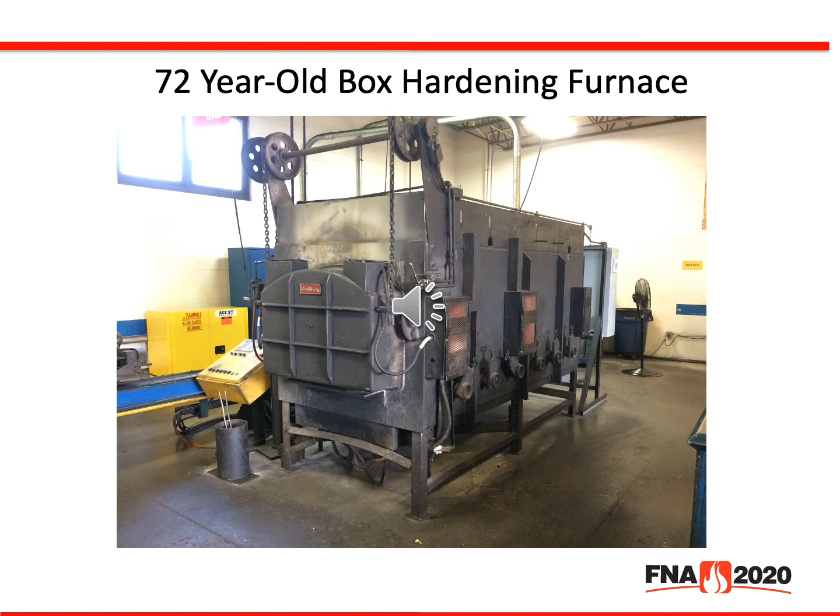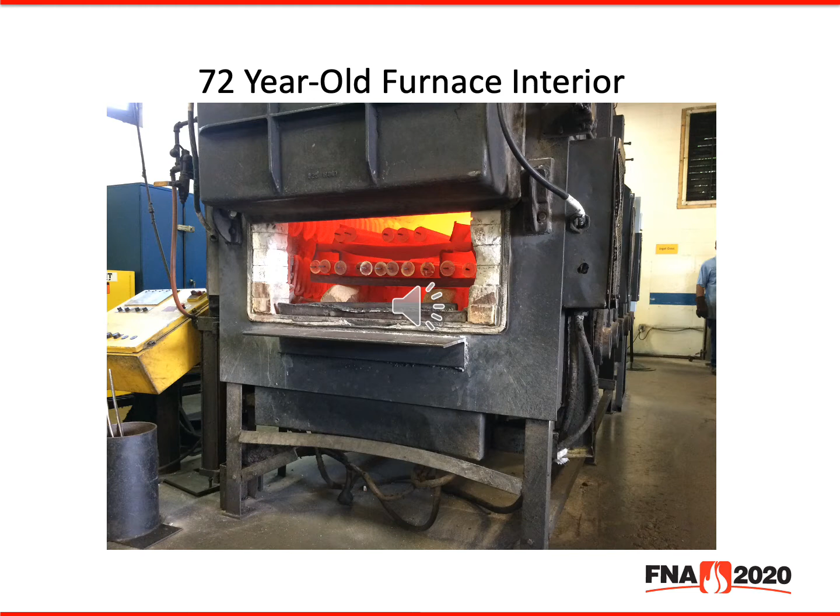This is slide 3. The front door is open. You'll see that there is a power connection for the front door, but looking inside, the customer's parts are placed on a rack that an operator typically reaches in with a pair of hot tongs, pulls them out, and feeds them into the forming press. You can see by the sway bar on the lower part of the furnace, it has been in operation for quite a while, but it's still kicking away.

This is slide number 4. This is a list of the key features that typically make up a box furnace. What we'll do today is review some of the temperature ranges of the various type furnaces, the heating element design, the gas burners used in gas-fired systems, atmospheres used in this equipment, the various types of refractory linings, some different hearth designs, and loading methods as well.

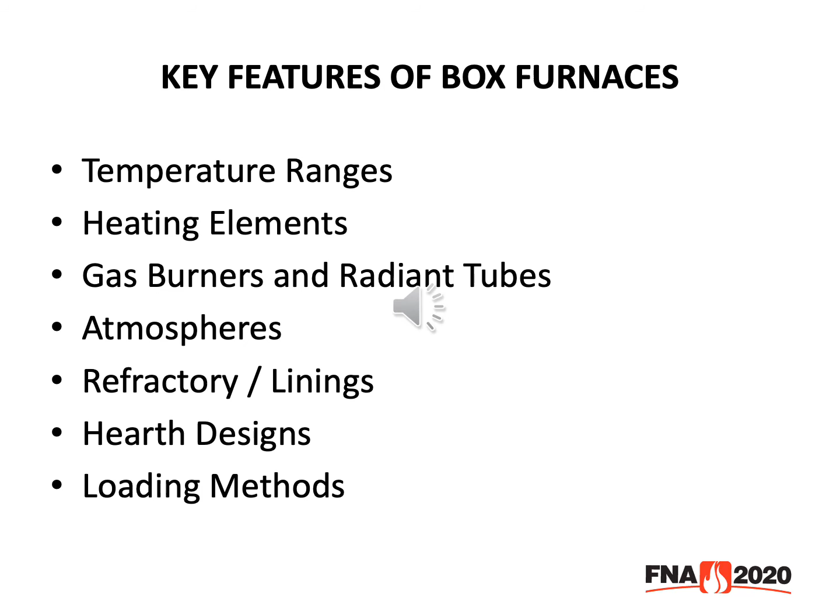This is slide number 5. We talk about temperature ranges in equipment. Oftentimes customers say, I need an oven, or I need a furnace, or I need something for temper or hardening, and they really don't know the application or the temperature ranges required of the material they're using. I've listed here 5 separate processes: tempering, hardening, annealing, carburizing, and tool steel hardening.

To the right, you'll see the typical temperature range for tempering, typically anywhere between 350 degrees to 1400 degrees F. For hardening, we're more in the range for steels, around 1500 up to 2000 degrees. For annealing, it can vary based upon the steel grade from 1400 degrees to 2000 degrees F. Carburizing in box type furnaces is typically done in the 1650 to 1800 degree F range. And hardening of tool steels ranges anywhere from 1800, 1900 all the way up to 2500 degrees F.

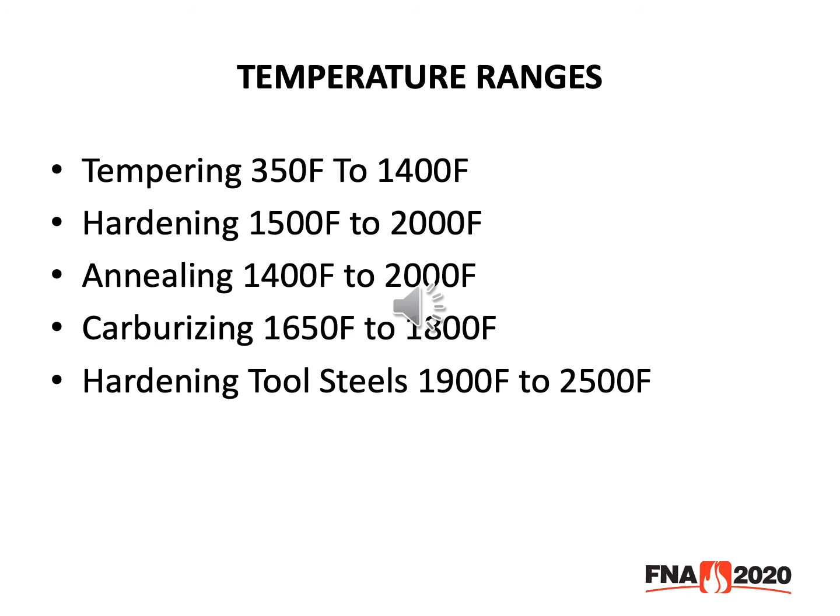Here in slide 7 is a 1400 degree tempering furnace, same size furnace with a workspace of 48 inches wide, 84 inches deep, probably rated for about 6,000 or 7,000 pounds. It has full width churning rollers, so in this application the customer is using a base tray with parts mounted on top of it, and he probably has a roller table in front that he would power in or pull out or push in the large capacity castings. Again, this has a vertical lift door. This particular model is gas-fired.

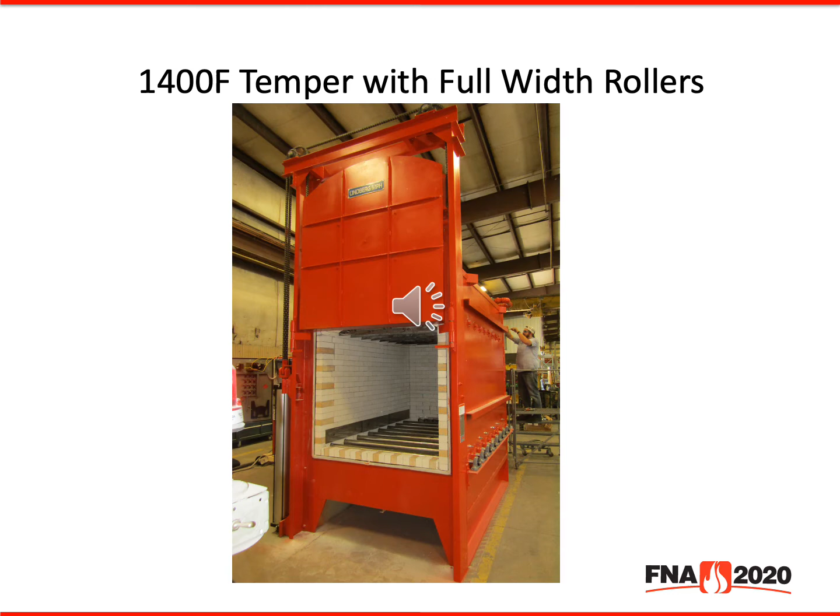In slide 8, this is a standard box hardening furnace. This unit would be rated for applications from 1400 to 2000 degrees F. It has a vertical lift door with a lift cylinder, so it's an air-operated door, with cam locks to hold the door tight. This furnace could also be used with an atmosphere, so to hold the integrity of the furnace, we have a door seal to make it gas-tight against any air rushing into the chamber. This is typically used for a nitrogen application, hardening tool steels. Again, this is an electrically heated unit.

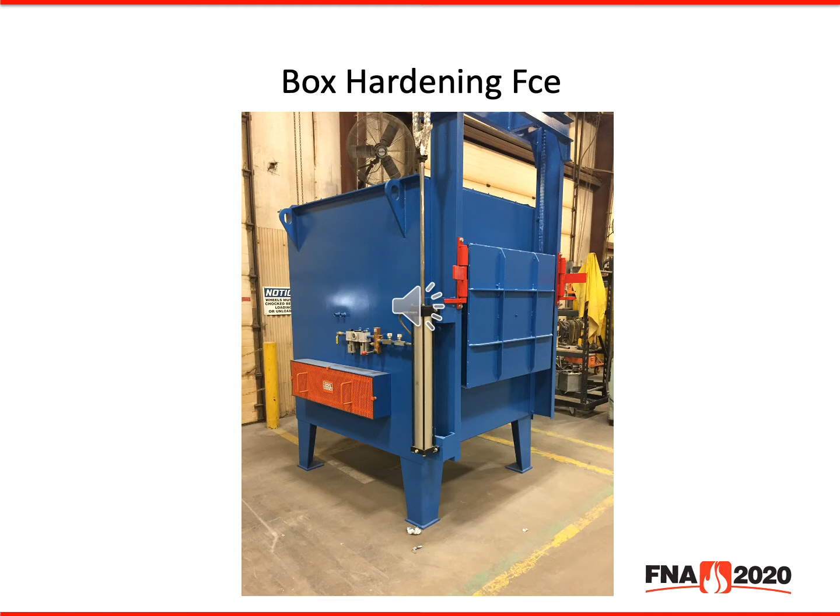In slide 9 here, you'll see a gas-fired box furnace. Again, a vertical lift door, a smaller chamber, probably a 24 by 36 by 24. This could be rated up to 2000 or 2200 degrees. At the rear back of the furnace, the lower part is a combustion air blower, and there are gas-fired burners on this side of the furnace, with probably 2 additional burners on the other side to provide the heating for this chamber.

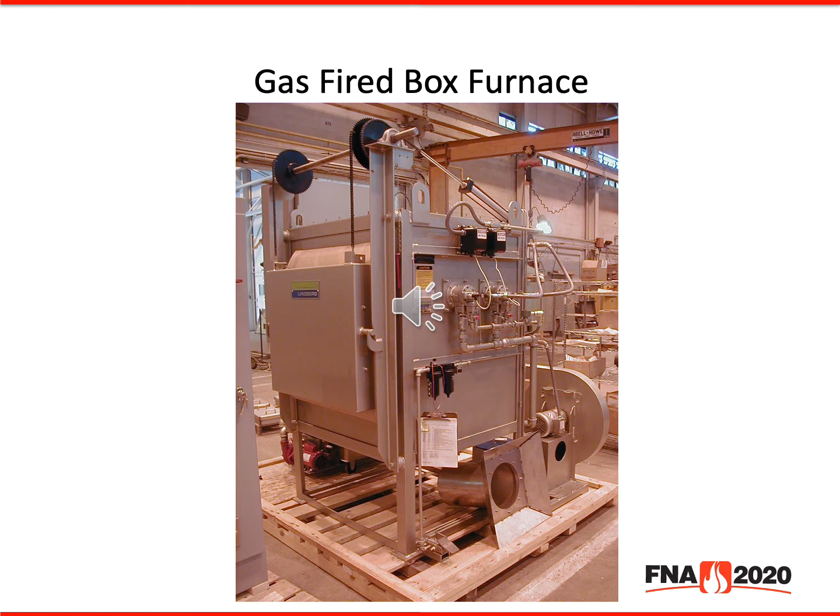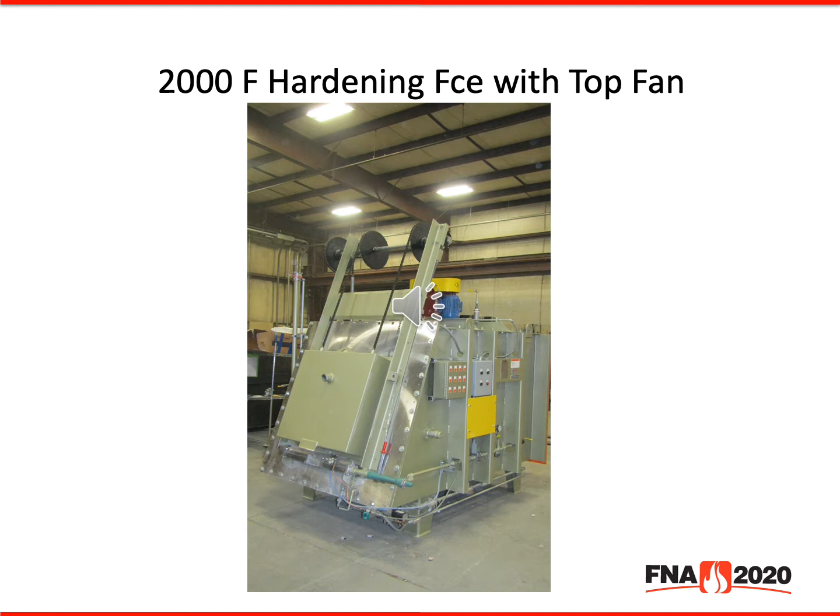In slide 11, we're looking at a small integral quench furnace. I'm not going to dwell on integral quench furnaces. They are boxes, but they also have a quench tank attached. These were developed in the late 60s, and there's been thousands built by a variety of manufacturers. This particular unit is a small 12-24-10.

It's a manually operated system, so you'll see by the small dolly cart in front that you can push this load into the chamber over the quench tank. The inner door opens, pushes it into the heating chamber, and the part is simply removed with a shepherd hook into the quench chamber and then lowered into the quench tank for applications. These are great for small components for ammunition type gun manufacturers, small parts for tool and die makers. Typically the loads are very light - I think the load capacity on this size furnace is probably in the area of about 100 pounds gross.

Here in slide 12, you're looking at a larger integral quench furnace. This is a 24-36-24. You'll see that this has the quench tank attached, much like the small IQ furnace in the preceding bulletin. This unit is probably rated for about 1,200 pounds, with a 24-36-24 gross load. This unit is electrically heated. Again, very popular with a lot of commercial heat treaters and smaller gear manufacturers where the components are smaller.

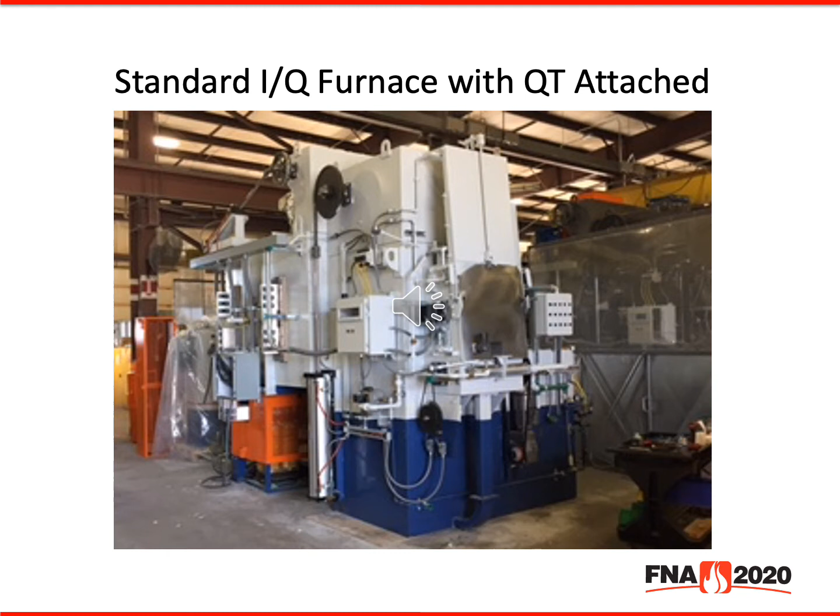These integral quench furnaces have ranged all the way up to 48 by 72 by 36 for 6,000 pound loads, and even some larger loads made for other applications as well. Probably the most universal furnace out there in the heat treating market today.

This is slide 13. What you're looking at is a row of large gas-fired box furnaces rated for 2,400 degrees for 30,000 pound loads. I'll illustrate more about this equipment later on, but it just shows that the dynamics of box furnaces can be very small for tools or very large. This workspace here is roughly 9 foot by 9 foot by 6 foot tall for 30,000 pounds. These are for some large forging applications. These parts are heated in these furnaces, and there's a manipulator that goes in and grabs the work basket and pulls it out into the quench tank that is in the floor position in front of each furnace.

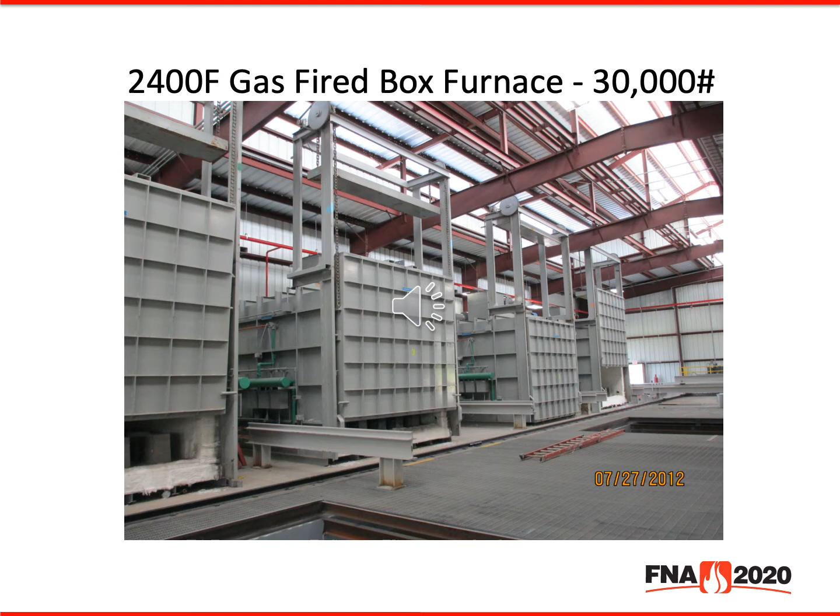In slide 14, you'll see another variation of hardening furnaces. These are 3 stacks of heating chambers used for the hot stamping market. In this particular application, we're taking some very light door frames or door pillars that are used in the automotive market or deck lids. What we're doing there is heating the parts in the furnace.

A robot comes out and snatches the parts out of the chamber, brings them out rather quickly, puts them into the forming press, which is stamping and holding and cooling the part all in the same press. This application is used today very widely through all the automotive manufacturers throughout the world. These units are rated typically for about 17 or 1800 degrees F. They can be provided with an atmosphere to keep the parts clean. Again, the cycle time or residence time in each chamber is only about 3 to 4 minutes total.

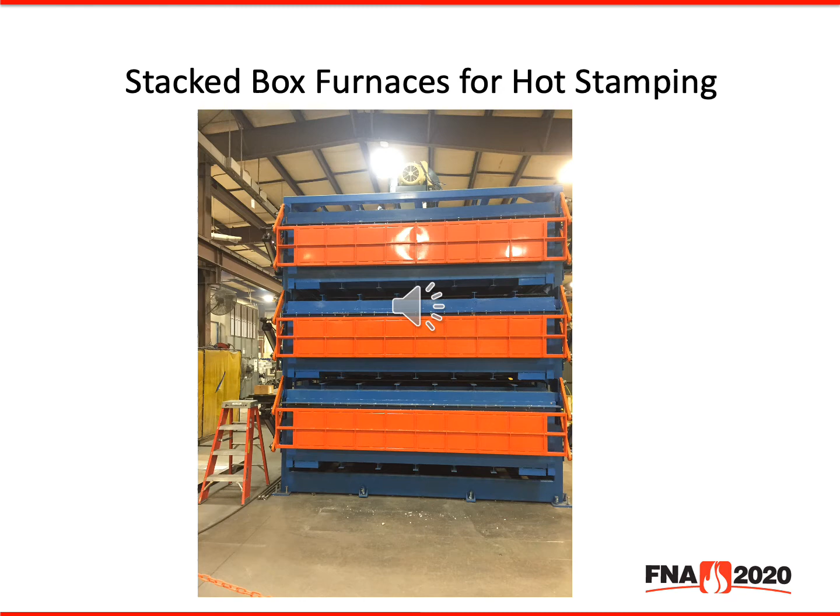In slide 15, this is a very old 2500 degree atmosphere furnace for hardening tool steels. This happens to be at a used equipment location. The doors are blocked by wood just to show the interior of the furnace. These furnaces were very popular for several years because it provided a higher temperature for tool steels.

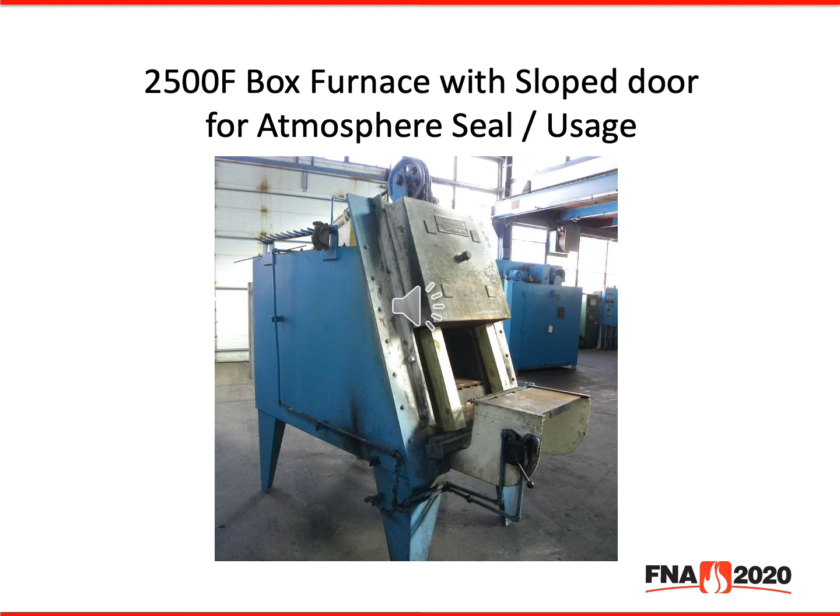In the recent past, these furnaces seem to be supplanted by vacuum furnaces because vacuum can provide the higher temperature application. Most of these furnaces were used for air quenching, so vacuum furnaces nowadays have at least a 2-bar and all the way up to 10-bar, which can provide a higher pressure quench, and the furnaces don't have to be idled - they can be shut off and turned on when needed. So these have fallen out of favor towards the vacuum furnace market, but are still a vital piece of equipment over the years.

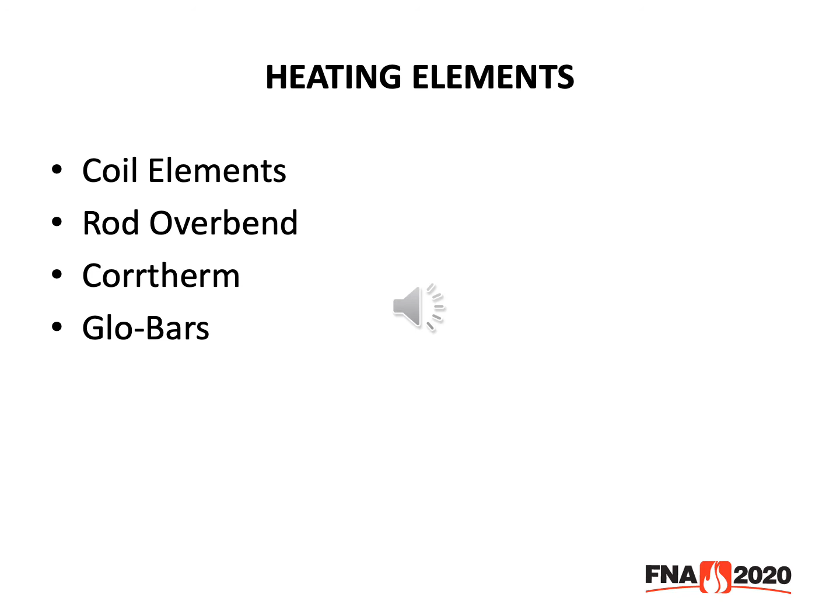In slide 16, you'll see a list of heating elements used for atmosphere box furnaces in general. There's a coil element design, which I'll be illustrating in future slides - coil elements are used primarily in tempering furnaces up to 1400 degrees. The rod overbend is a serpentine wire that typically hangs on the walls, ceiling, or floor of heat treating furnaces. The Corrtherm heating element is an electric Corrtherm designed primarily for carburizing applications because it's made of a unique material. And the 2500 degree furnaces I just illustrated typically have a silicon carbide Glo-Bar.

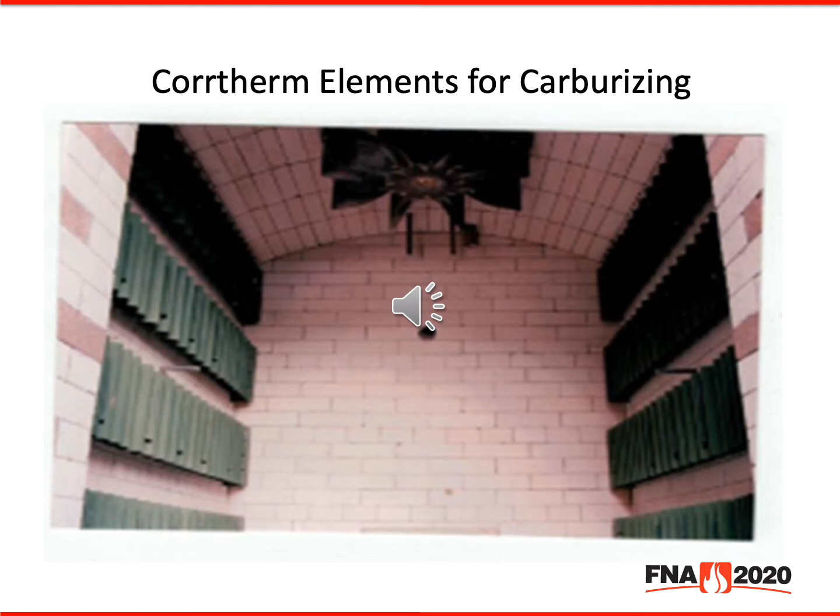Also, the green coating there is a frit coating that's baked onto the elements prior to installation. This also impedes and slows down any carbon penetration. And of course, the top mounted fan is used for circulating not only the temperature and the heat inside the chamber, but also the atmosphere.

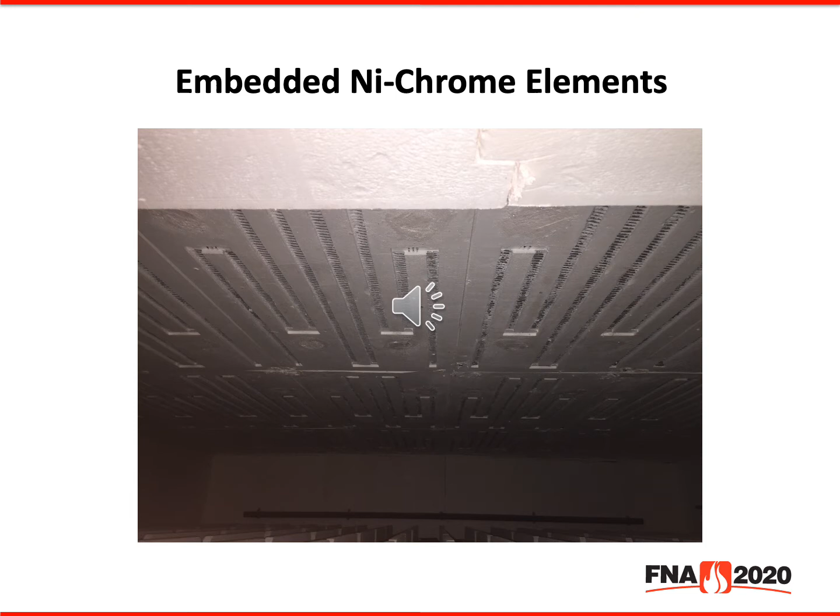In this slide, you're looking at a Moldatherm embedded pad. These are nichrome heating elements that are vacuum formed in with the ceramic fiber material to form a heating module. These heating modules are very convenient for smaller applications. In this case, this is used in a very large hot stamping furnace as the roof module, and you'll see in another slide that we use the standard and conventional rod overbend type heating element for the bottom element. Again, these have been developed by Lindberg many, many years ago and are still very popular today.

In slide 21, you're looking at a larger portion of this Moldatherm pad. This is again a hot stamping furnace that uses the Moldatherm heating element on the top and the conventional nickel chrome rod overbend heating element on the floor. What you see there are large piers, rows of piers. These would support the body panels that are heated to about 1700 degrees F prior to hot stamping.

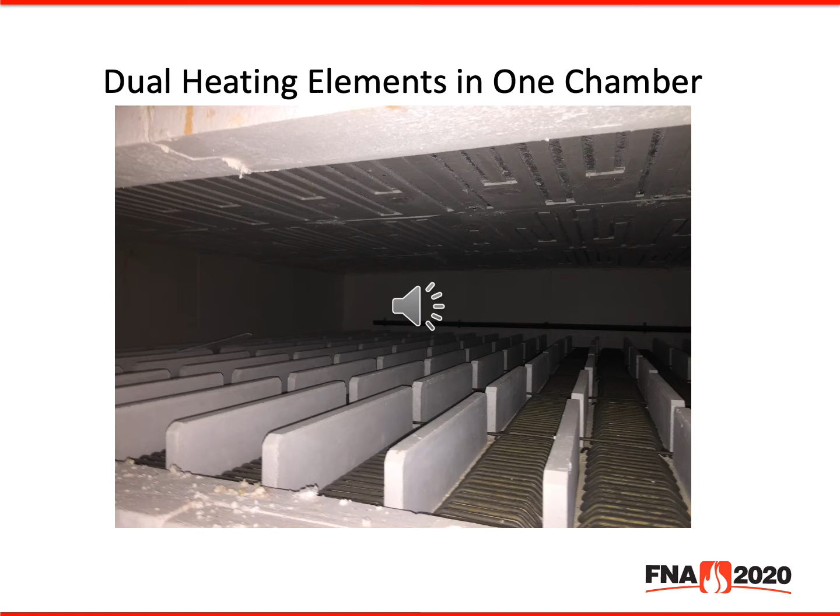In slide 22, this is again a photograph of a rod over bend heating element, this time with a skid hearth or a flat hearth used to put base trays in or parts or work directly on the hearth. Again, you'll see a combination of hard brick and soft brick for the vestibule and the ceramic fiber lining on the interior walls.

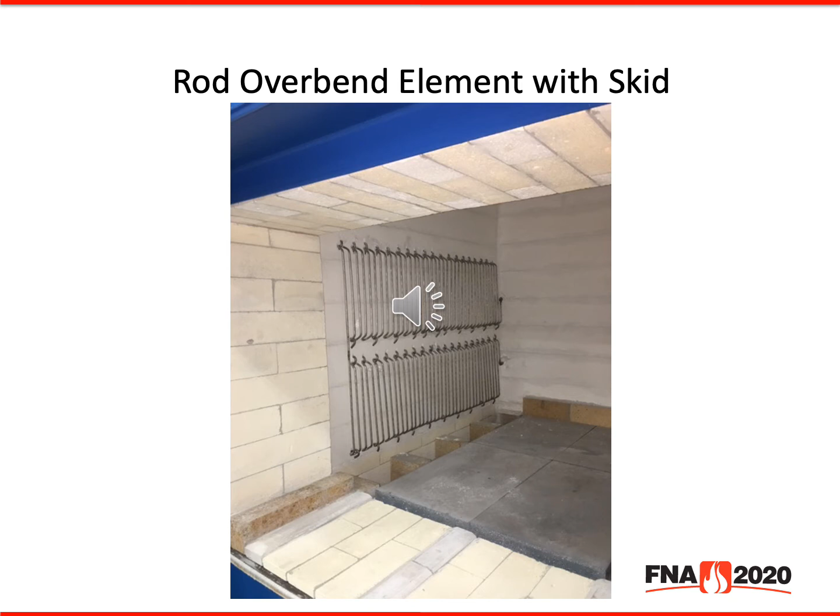In slide 23, you're looking at a Globar heating element design. Again, this is a furnace designed for 2500 degrees operating temperature. The Globars are typically positioned above and below the hearth. This is typically used with an endothermic gas type generator, and the electric heat elements are used for a radiant type heat as well.

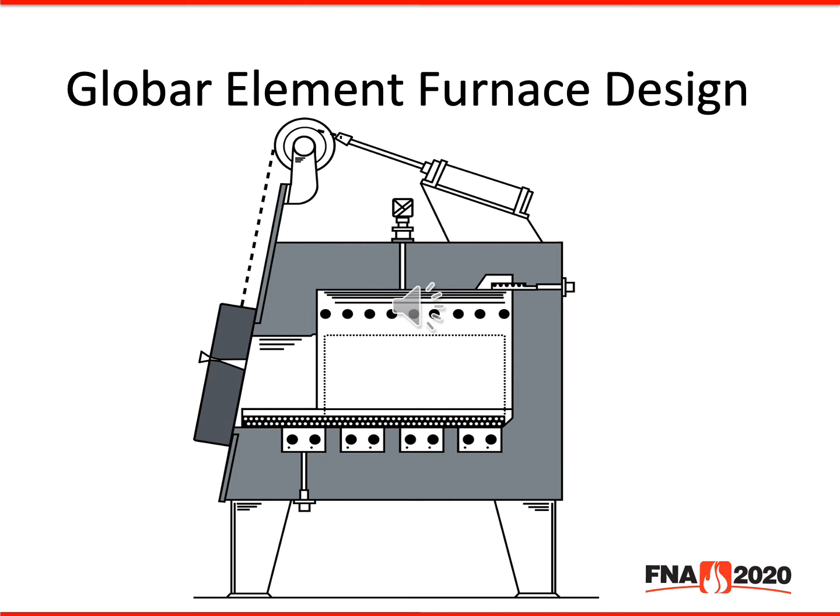In slide 24, we're moving on to gas burners or radiant tubes that are typically used in box type furnaces. This is either an open or direct burner or a radiant tube style burner. You'll see several different variations.

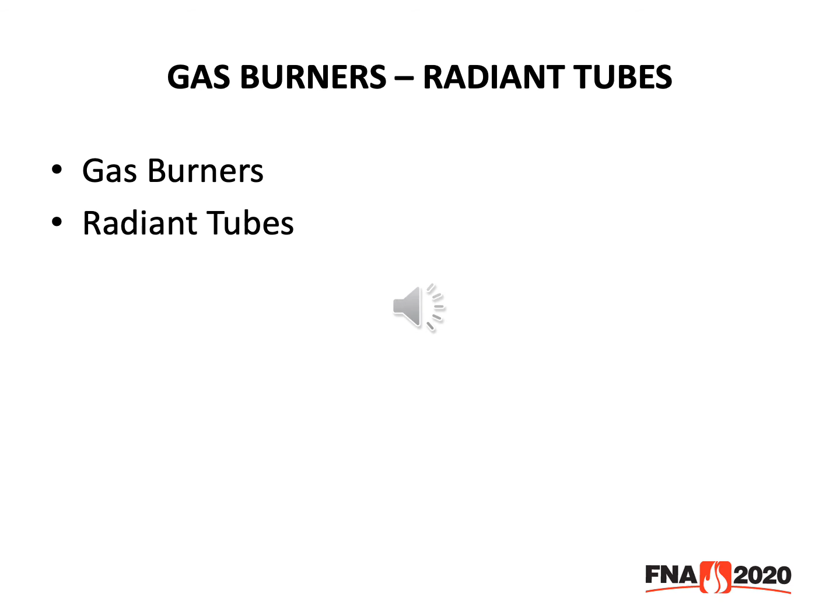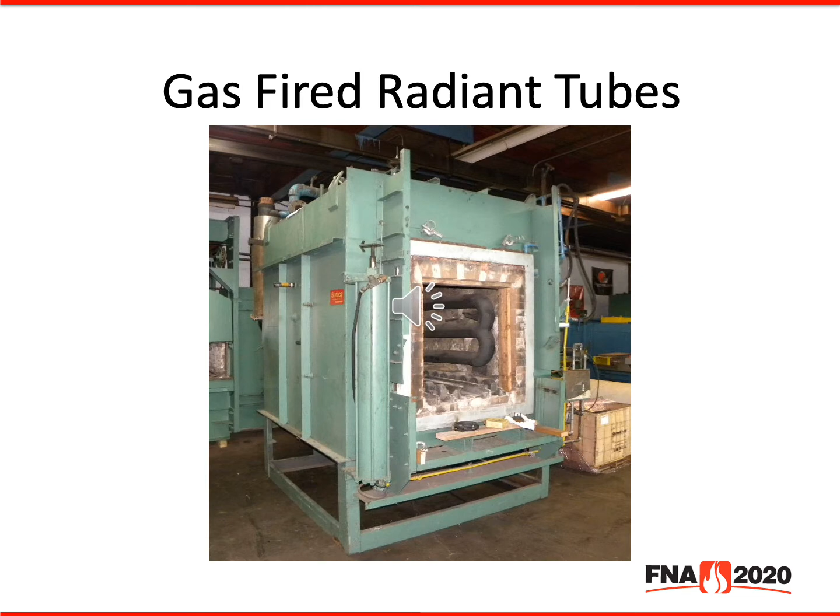In slide 25, you'll see this is a gas-fired radiant tube furnace. These particular tubes are mounted along the rear wall, or mounted on the side wall, and the input gas is from the rear wall. This is used in an atmosphere-style furnace rather than direct fire. So this would probably be a furnace rated for 1800 degrees F.

In slide 26, you'll see a close-up of the photograph that the preceding slide showed. Again, these are the W tubes, as they're typically called. It has a roller rail hearth. This is a very old piece of equipment. It is from a used equipment manufacturer, but this illustrates what was used in the past.

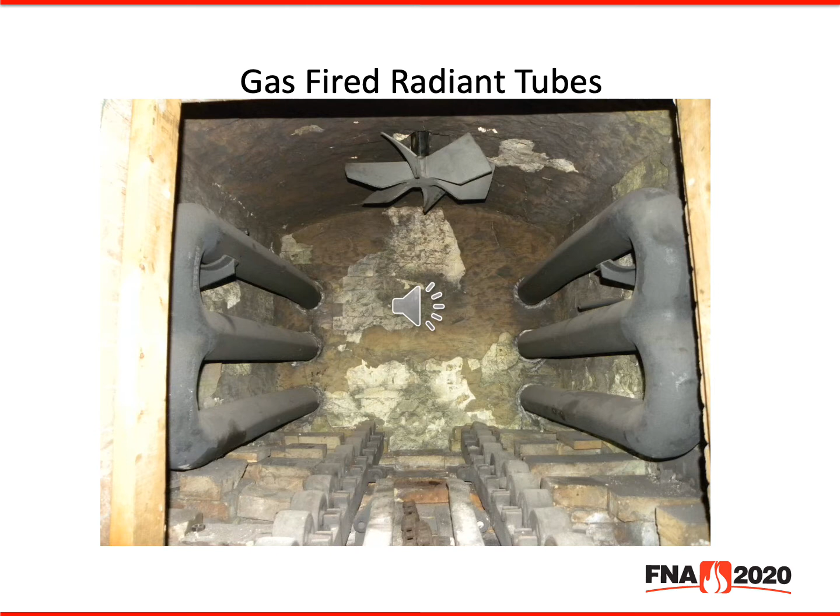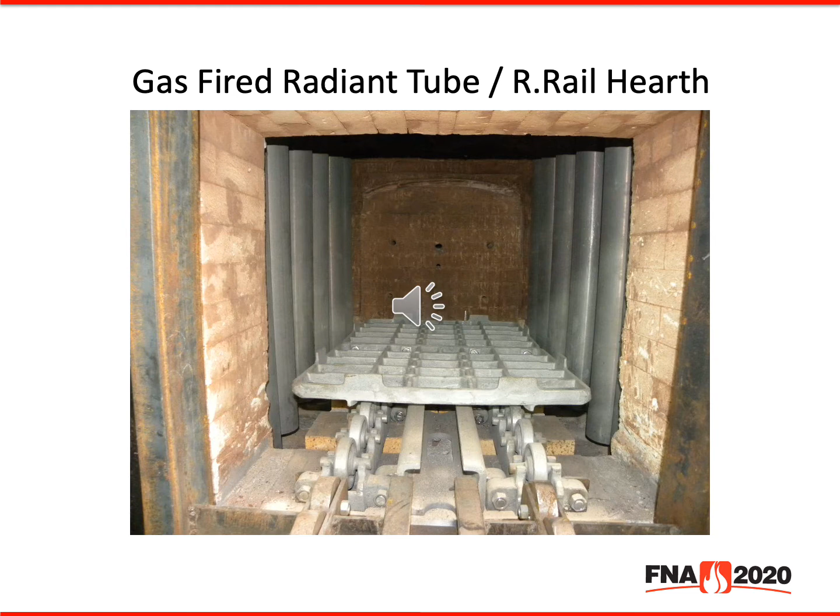As an in-between, before these top-mounted radiant tubes with recuperators were used, there was a dimple type tube that was fired from the bottom. The tubes were dimpled to give it some sort of combustion to pick up some heat and to assist in the heating of the product.

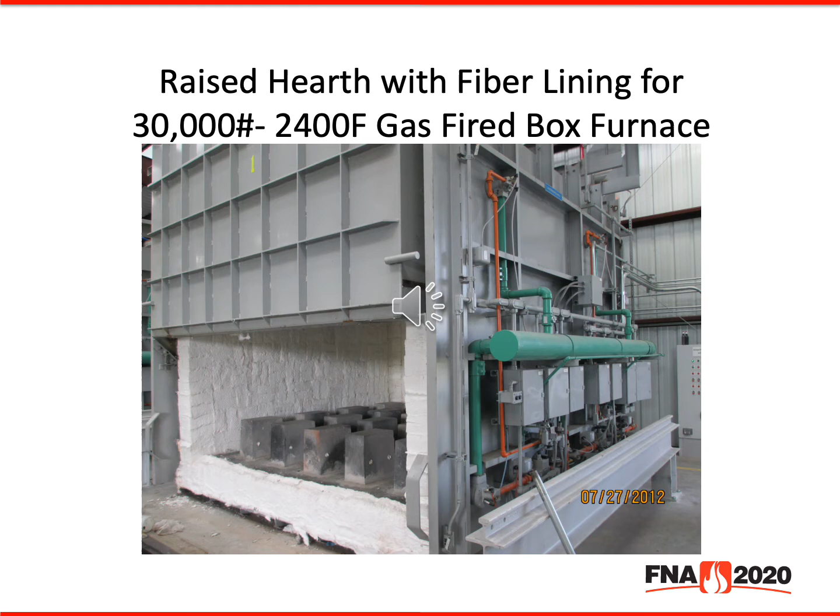In photograph 28, you'll see again this large gas-fired box furnace that we looked at earlier. This is a direct gas-fired furnace with the ceramic lightweight fiber lining and a vertical lift door. This furnace was rated for 2400 degrees F for a 30,000-pound load. These are for large castings and forging applications used for the aerospace and oil field type markets. These are direct flames, so the flames are typically sent between each one of these piers and fired from opposite walls, so you get good mixing of the gases and temperature uniformity inside the chamber.

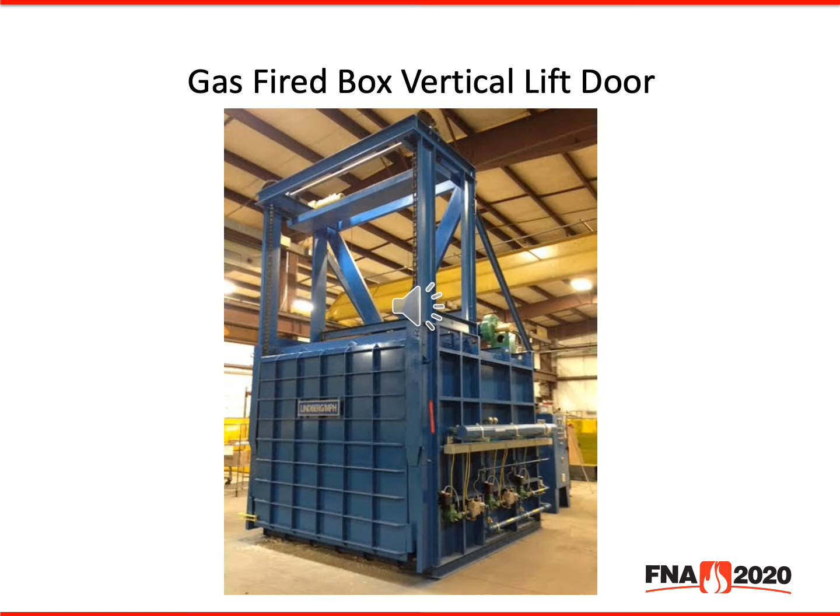In slide 29, we're looking at a much smaller gas-type box furnace. This will be used for maybe mold burnouts or mold preheating or some forging applications or stress relieving. Again, you'll see the burners aligned along the bottom floor of the furnace. This is, again, a vertical lift door on this unit. The chamber here is probably in the neighborhood of 5 by 5 by 5 with a 10 or 15,000 pound workload.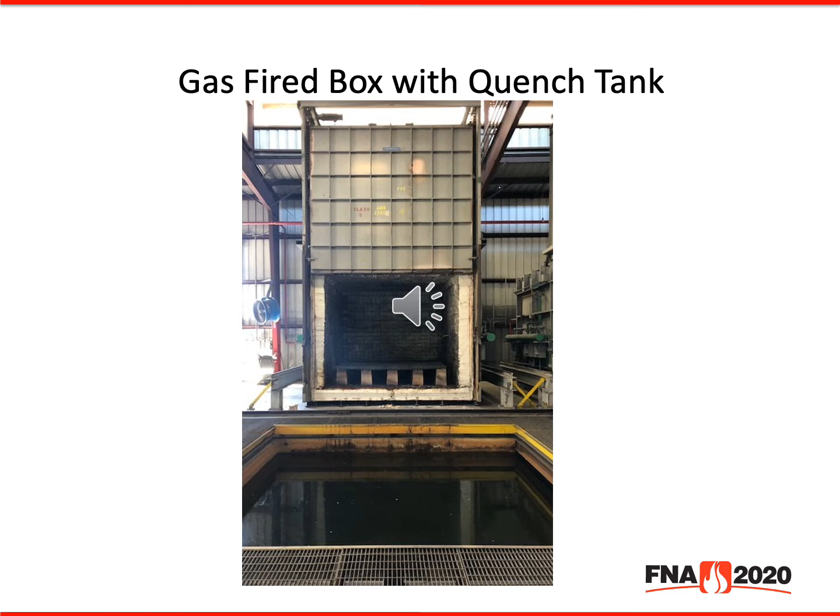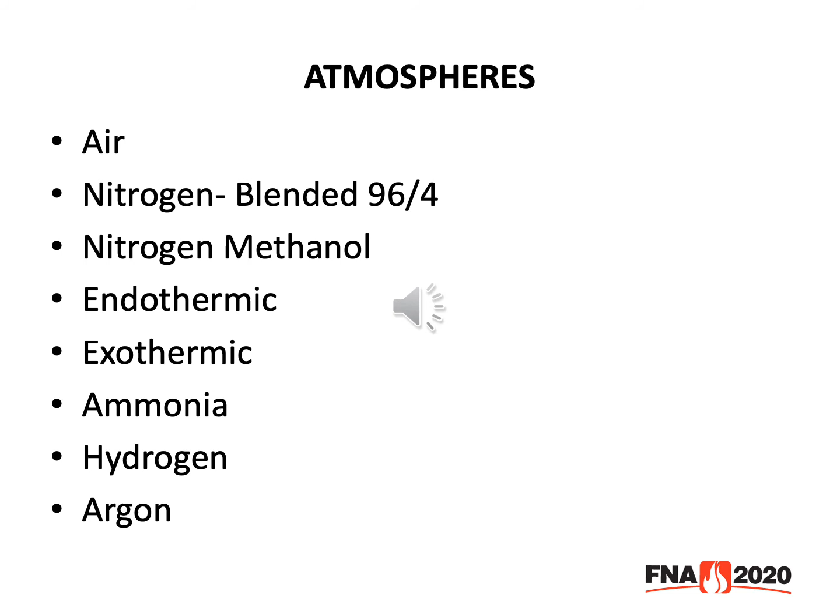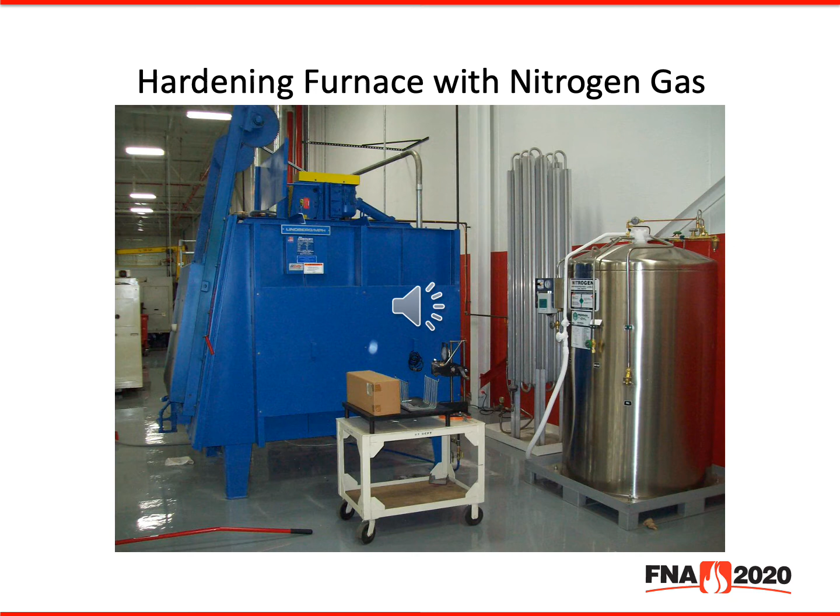A very simple setup. In lieu of the tank there, the customer may have a bulk tank supply outside, and that bulk tank supply is typically just plumbed into the system. One other thing that nitrogen gas is used for is as a safety gas as well in a lot of these applications.

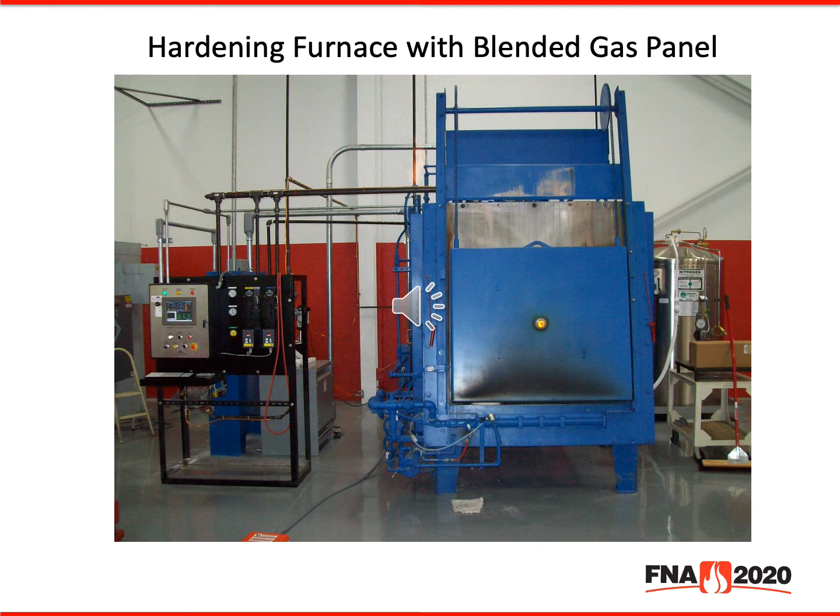You'll see the flame curtain in the front of the furnace, some discoloration where the flame curtain is opened has tarnished the front door. It also has a vertical lift sloping front door as well, which tells me that, again, it's an atmosphere furnace.

This is slide 34, and the next slide following will illustrate a retort that is typically used in smaller applications. These are great for smaller components, wire, smaller parts. Typically, the retort dimensions are probably in the 24 by 36 by 18 range. You're looking at parts of 500 pounds.

Sometimes the retorts, in this case, are fixed or placed in the furnace. Sometimes, if they're small enough, there's a dolly where the retort and fan plug could also be moved about, moved in and out of the furnace as well.

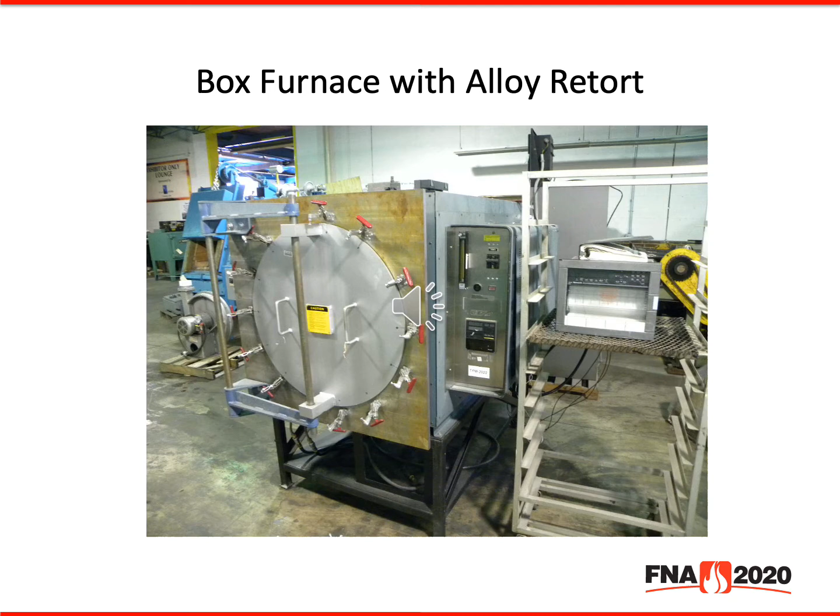With this, there's typically, again, a blending panel or a variety of gases - hydrogen, argon gases, helium, and such - used for whatever the application is and whatever the material grades are. Quite a common kit.

This is just typically a heating element plug. These heating element or retort designs are typically made from Inconel 600 or a high-grade stainless steel to withstand the temperatures and to maintain the gases inside the heating chamber.

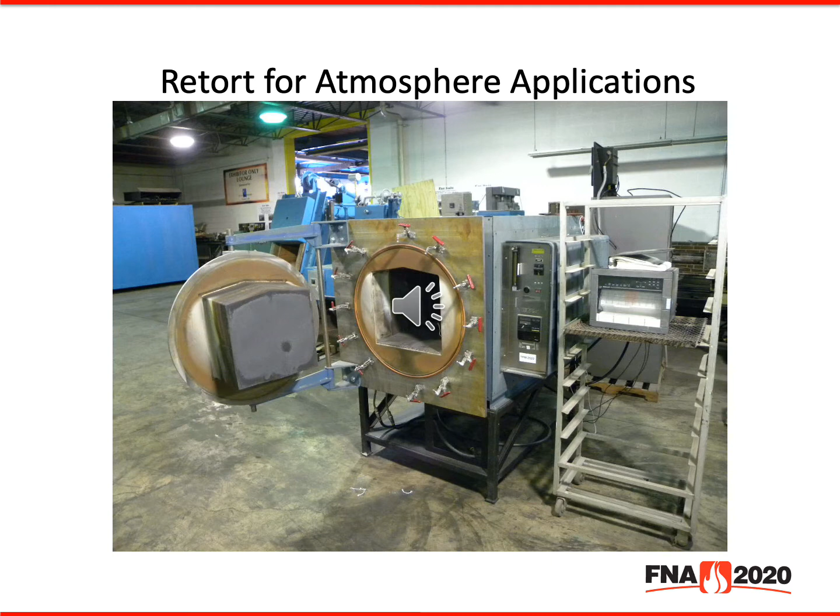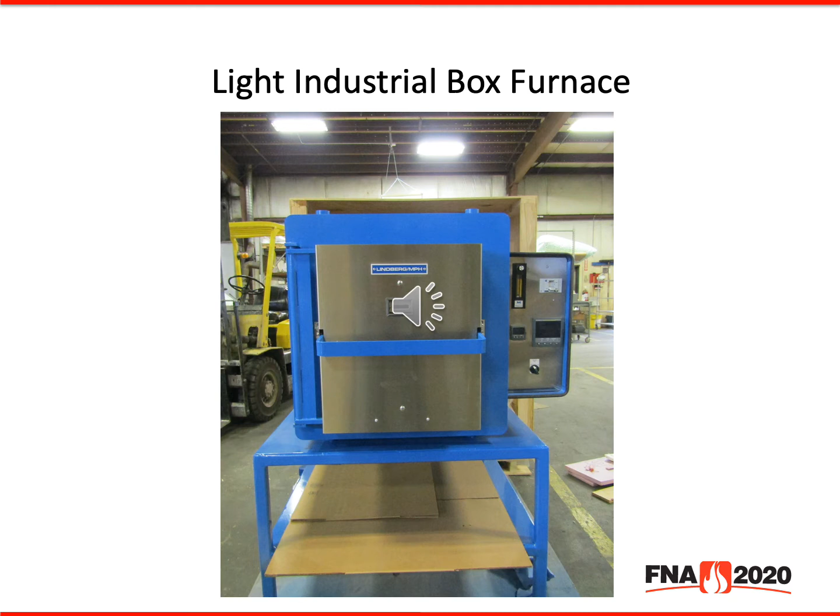Normally this type of furnace is set on a table or there's a stand that may have the hardening furnace in one position and the tempering furnace slightly above it as an over-under, maybe even with a roll-out oil quench tank.

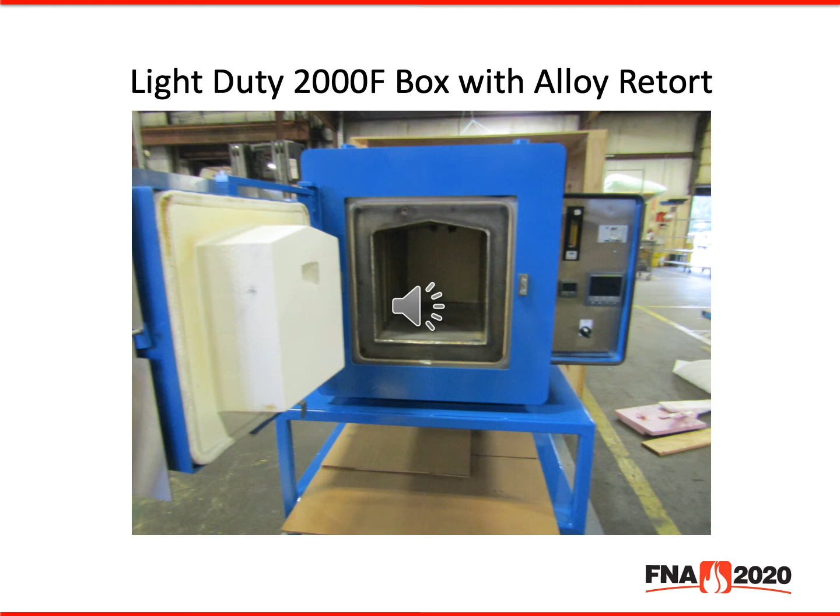You'll see a very simple plug door type insulated section that closes, and then on the control panel to the right, you'll see a small temperature controller and also probably a flow meter, a nitrogen flow meter that's quite common with these small light duty retort type furnaces.

In slide 38, we're again looking at the older 2500 degree box furnace with the sloped door. Why I wanted to illustrate this photograph here, you'll see a variety of flow meters that are mounted to the side of the furnace. So you may have an endothermic gas flow meter, probably maybe an ammonia flow meter, a nitrogen flow meter, again all for various processes and requirements that are needed for tool steels or high-speed cutting tool steels.

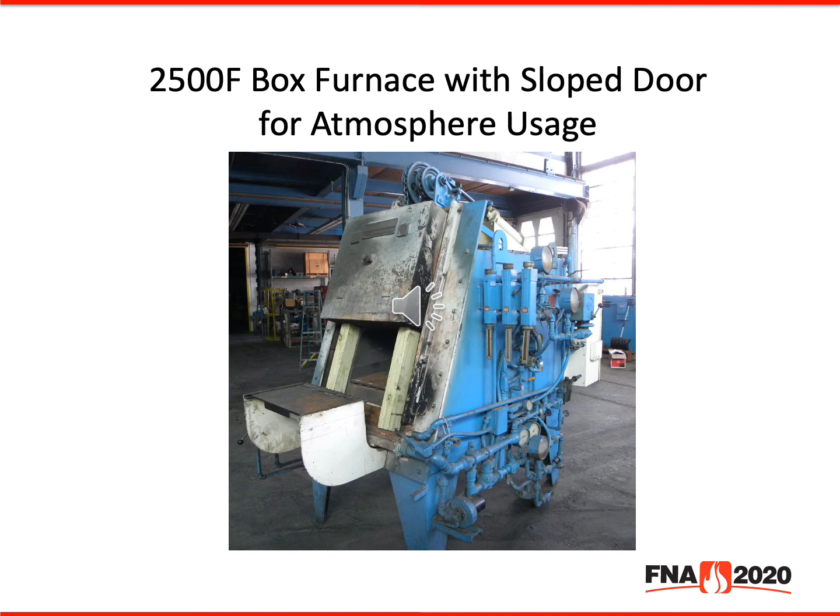In slide 39, you're looking at a temper furnace with a gas-tight shell, compatible with using nitrogen gas. It has a continuously welded shell, a special fan motor seal in the rear, and front doors that are normally clamped to keep it tight and minimize air infiltration into the heating chamber. These come in a variety of sizes, typically electrically heated as a rule of thumb when using nitrogen, with operation up to 1400 degrees.

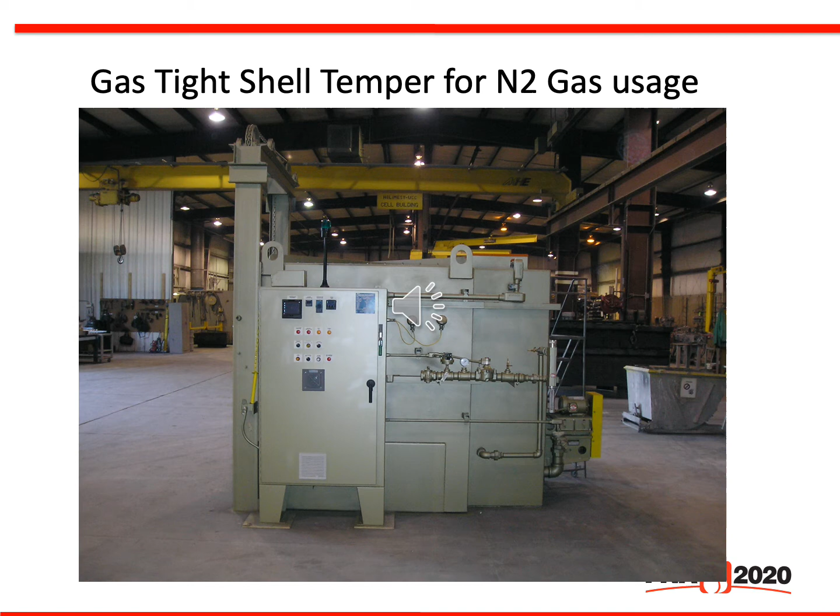In slide 40, you'll see a list of refractory linings. Over the years we've gone from brick to castables to ceramic lightweight fiber linings, and different types of hearth piers as well. Those will be illustrated in the upcoming slides.

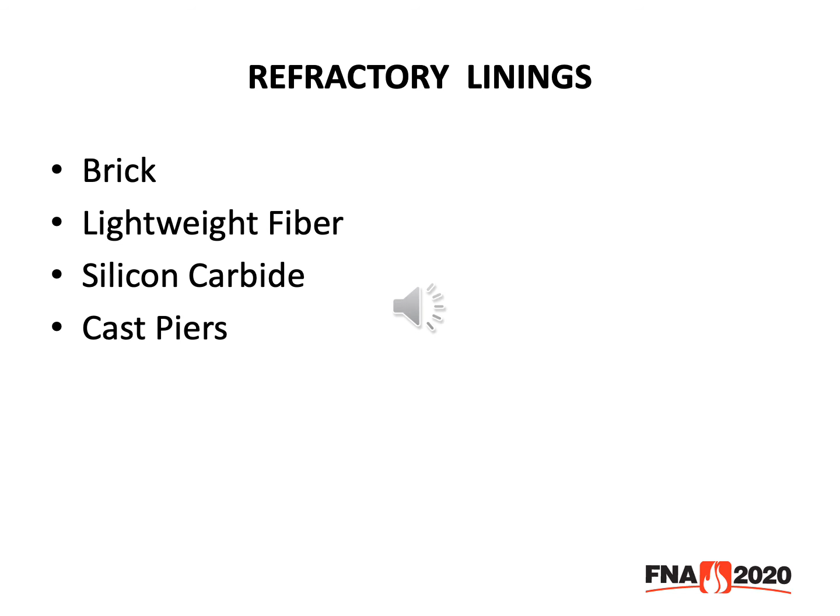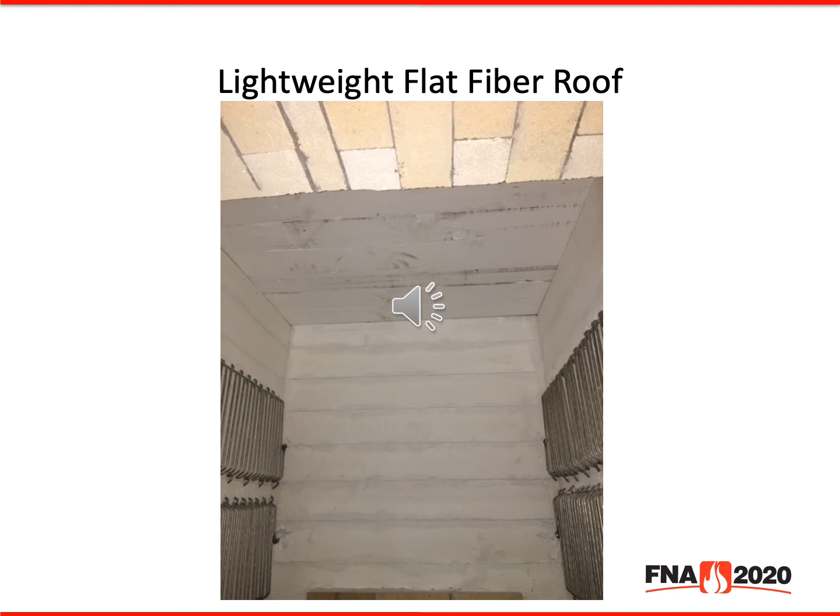In slide 41, you'll see lightweight ceramic fiber used in the roof of this furnace. Instead of brick arches that were common for many years, this lightweight ceramic fiber allows the manufacturer to use a flat type roof. There's no fan in the roof, so this would be a 2000 degree furnace, typically plus or minus 15 or 20 degrees F. The front door arch does have some brick to help with strength of the door and vestibule, but inside the heating chamber there's no arch—just a span of lightweight ceramic fiber going from wall to wall. Quite popular.

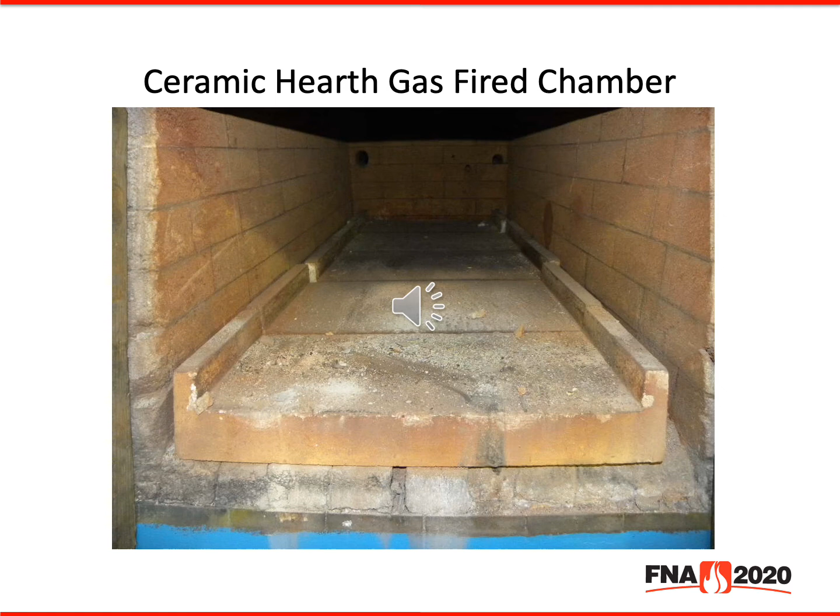In photo number 43, you're looking at a very older style furnace, typically a ceramic type hearth used in a gas-fired furnace. Again, this was from a used equipment supplier that had it for sale. You'll see some old hard bricks on the side wall. In today's market, those are typically replaced with lightweight ceramic fiber lining. Even though there may be a cast hearth in the bottom, it could be a ceramic hearth depending upon the temperature, the weight of the parts, the type of the parts, and the length of the parts as well.

Moving on to hearth designs in slide 44, we talk about a skid hearth, a roller rail hearth, full width turning rollers, fixed piers, or raised piers. The following slides will illustrate the variations of hearth design used in box type furnaces today.

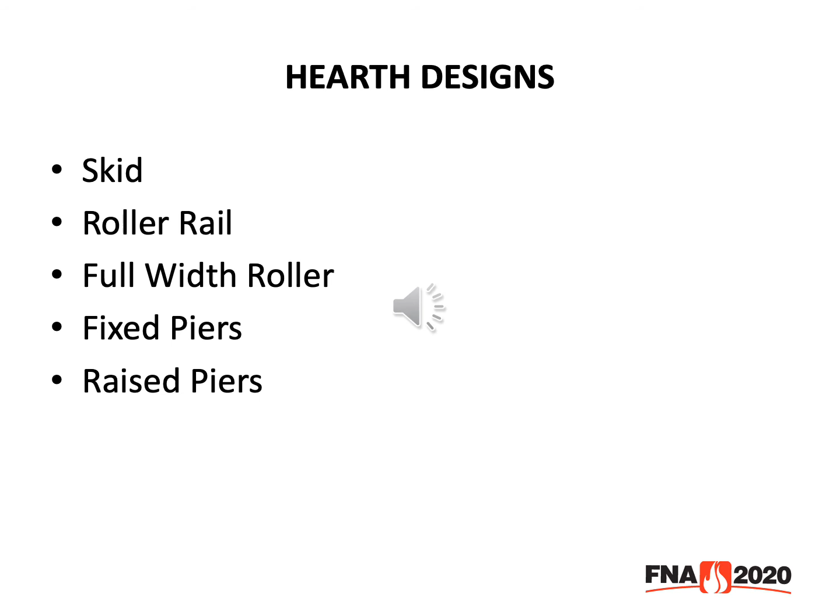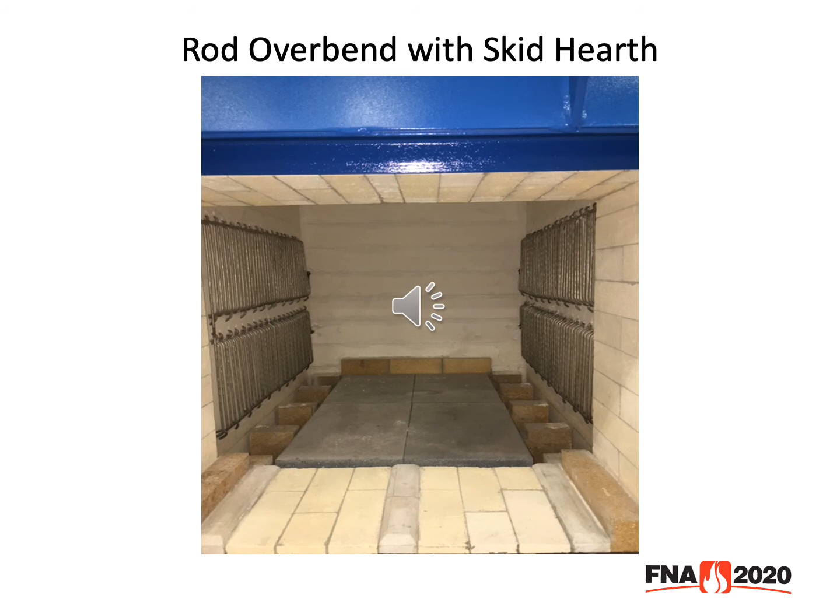In slide 45, you're looking at a rod overbend furnace. I think we used this photo before, but again this illustrates a silicon carbide skid hearth, or flat hearth, that is commonly used in several hardening type furnaces.

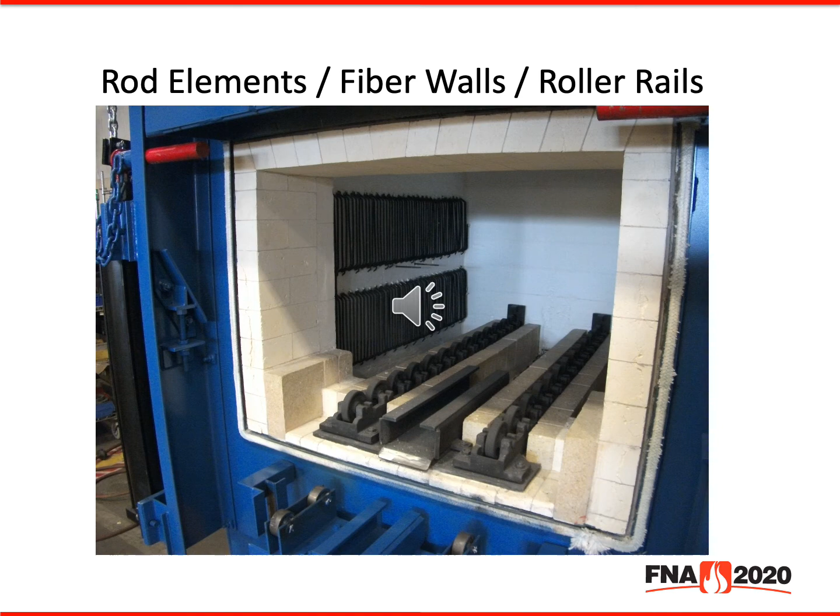In slide 46, this is a heavy-duty roller rail type hearth used in equipment today. Again, there would be a load table. The base tray would be designed to have a notch or slots in it so it would slide upon the rollers and still provide heavy-duty support for any baskets, trays, or large product that would sit directly on top of the hearth.

In slide 47, this is a lighter duty roller rail hearth. This is actually an oven construction application, but inside you'll see two rows of roller rails, and then there's a section we call the chain guide casting, where the chain or pusher head attaches to the base tray to push it in or pull it out, acting as a bridge between a load table and the interior of the furnace.

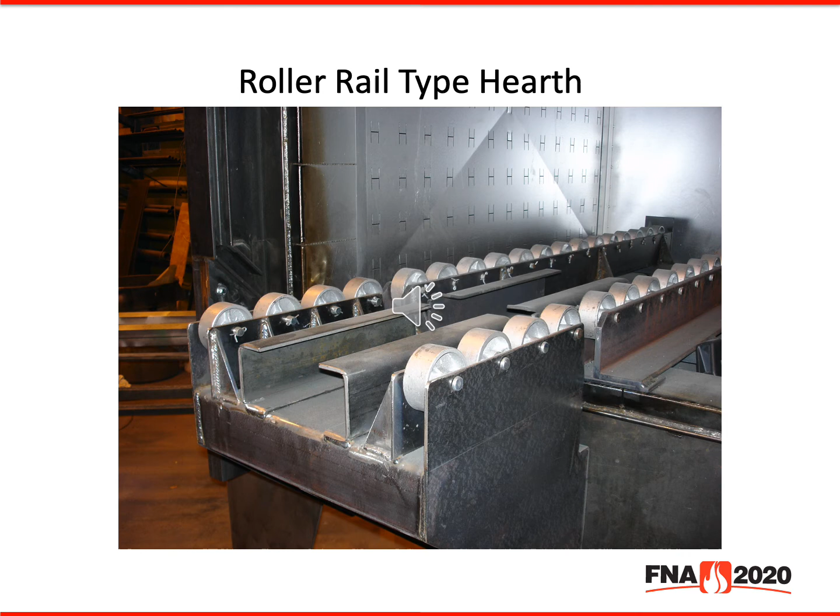In slide 48, this is a front view of a very large furnace system. This had a 48 by 72 by 36 workspace, rated for 2,000 degrees to be used with a blended gas. It has two top-mounted fans, but I wanted to illustrate the hearth to you. Again, this is a heavy-duty roller rail hearth that supported a 10,000-pound load. This particular furnace was also coupled with a quench tank to remove the load from the heating chamber across the rollers down into the quench tank, then submerged and lifted up. There was also a load table positioned in front and over the top of the load tank to move the load in and out of the furnace.

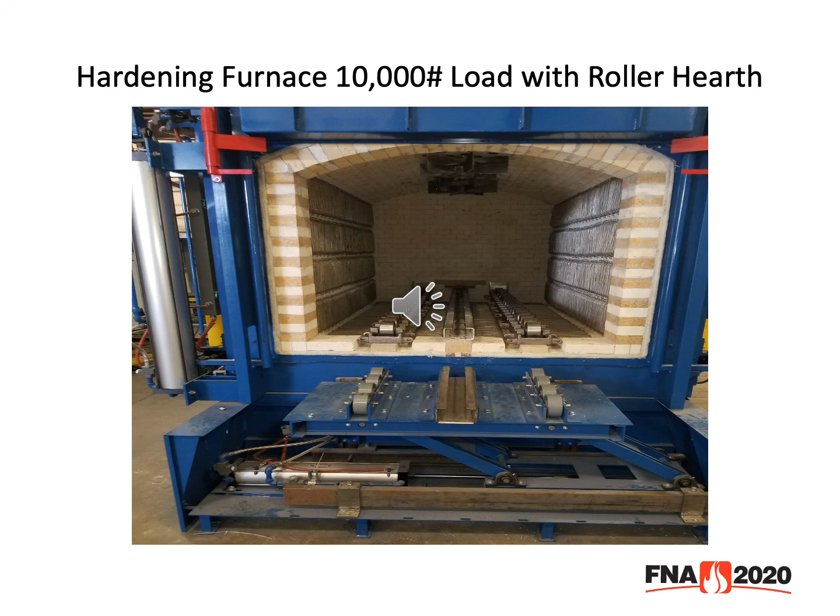In slide 49, you'll see another variation of rollers. This is called a split roller type hearth. This would be for a flat tray more so than a roller rail. In this case, you would use a flat tray that could be reversed if it warped or lost its shape, so you could put a variety of baskets on top of it. Again, it uses a pusher head or puller head to remove the tray in and out of the equipment.

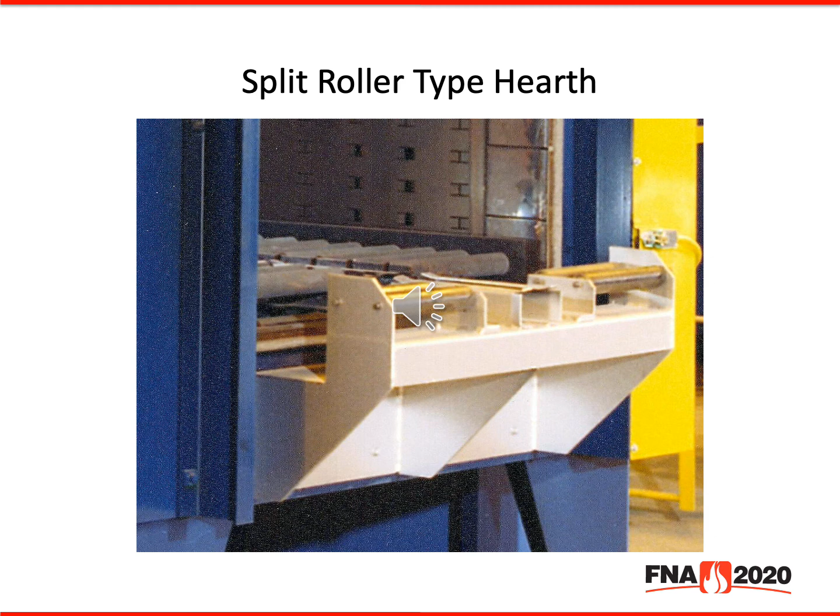In slide 50, you're looking at a fixed rail type hearth. These are simple posts that go to the base of the furnace, just flat rails running front to back. These are typically used when you're using a Big Joe type loader, a small hand truck, or a high-low type loader, which you would roll in. The wheels in front of the Big Joe would be keyed to the bottom of the furnace to keep itself aligned, and then you would simply lower the tray onto these rails, back out the Big Joe forks, close the door, and start your process. This is a very common type hearth used for lower temperature applications and typically lighter loads as a rule of thumb.

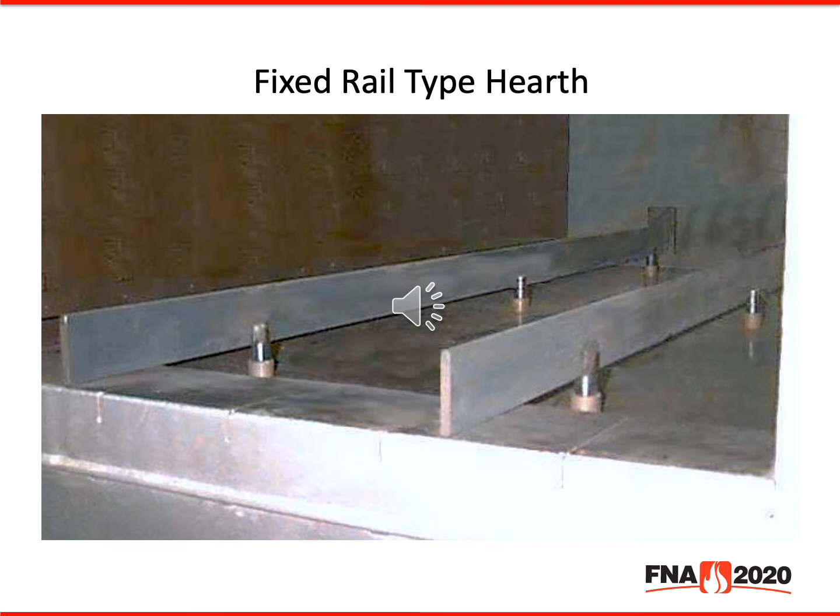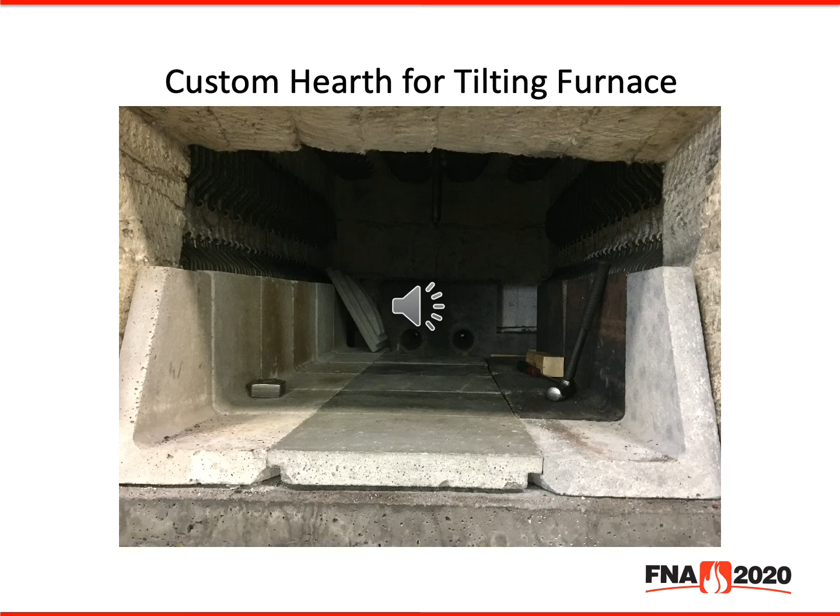Slide 51 is a custom design type hearth. It's rather unique - a tilting type furnace. This photograph was taken during a rebuild. What you're looking at is a custom hearth that has side lips on it, but what you don't see is that inside the furnace there's an alloy tray connected to two rods in the back. This furnace is loaded with a hopper that dumps the parts onto the load - these are valve stems for automotive applications. As it's heated, the part heats up, and for time of quenching there's a trough or tub of water in front of the furnace. This furnace actually tilts up to 45 degrees, and the hearth is vibrated or oscillated back and forth, shaking the parts off the hearth into the water quench tank. It's a rather unique design, and I thought it was worth presenting today.

In slide 52, this is the full width roller hearth. Again, this is rollers that can be powered, but typically not for lower temperature applications. Those familiar with a roller hearth furnace know you have sprockets and gears on the outside, and the furnace is turned to actually drive the load down through the long section of the roller hearth. This is similar to that, but they are typically not driven.

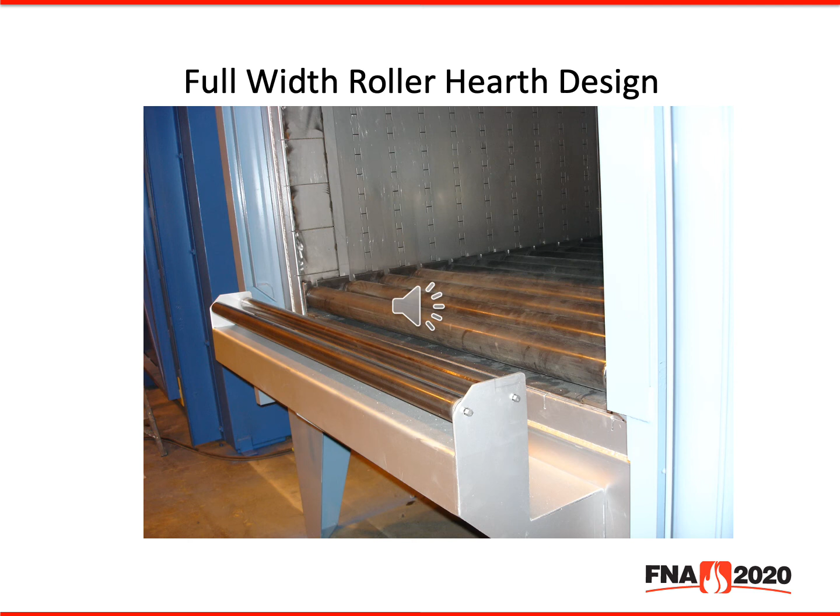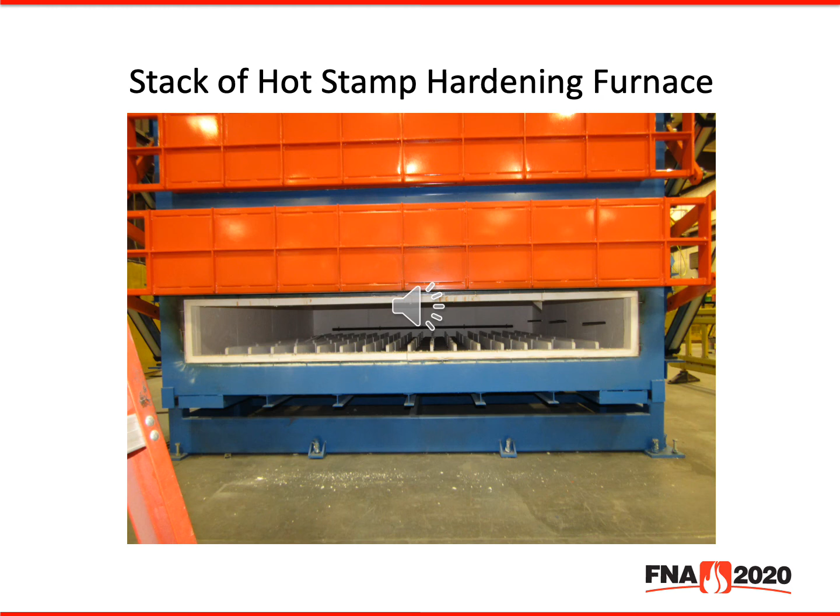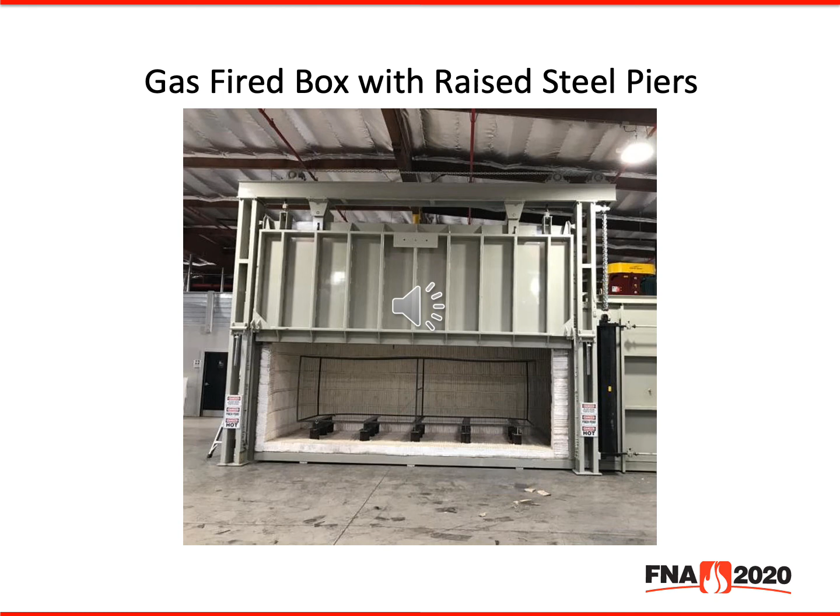Moving on to various loading methods. We have manual systems where you'll see an older gentleman with overalls in old photos with a pair of tongs. Very common today, people using an aluminized suit with hot gloves and a pair of tongs to take parts out of the furnace when it's smaller, and quenching it in a variety of baths - just air fan, oil quench, brine, or salts, whatever the quench media may be - still popular today. Then we talked about hand trucks, a very portable system that's moved around.

We have fixed type load tables, movable charge carts that power themselves up between several different common pieces of equipment, and these carts can be push-push or push-pull, sometimes with gearhead motors and pushers in the back wall of the furnace. Large manipulators can be used, as we illustrated in the one application with the large quench tank in front, and then also robots with end-of-arm tooling are now in vogue today.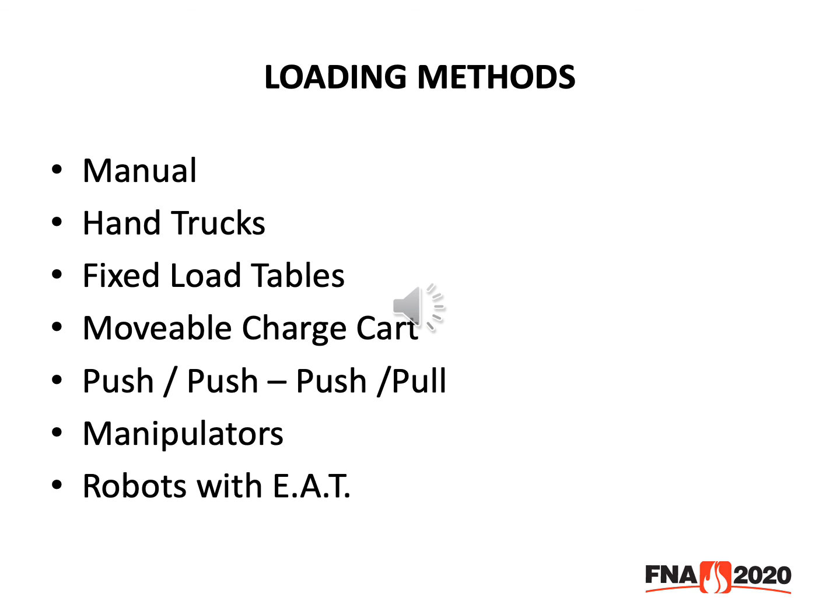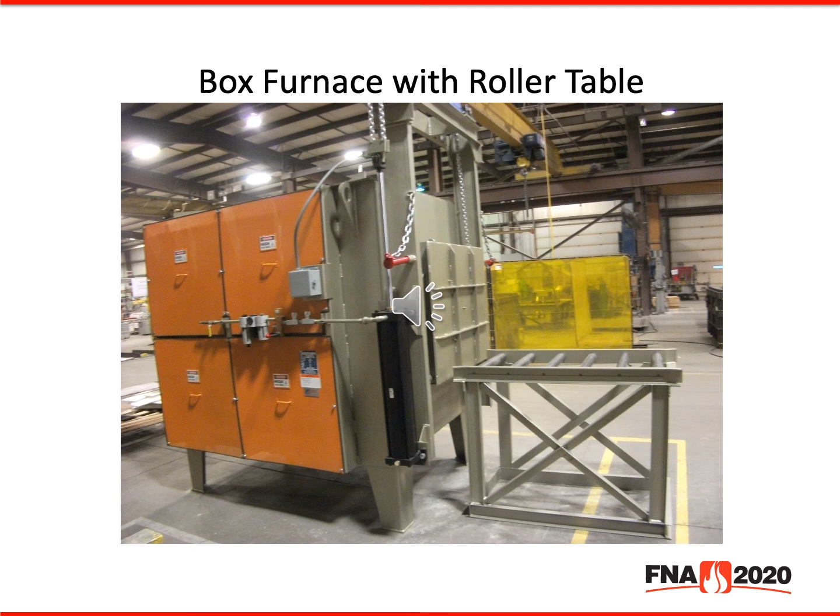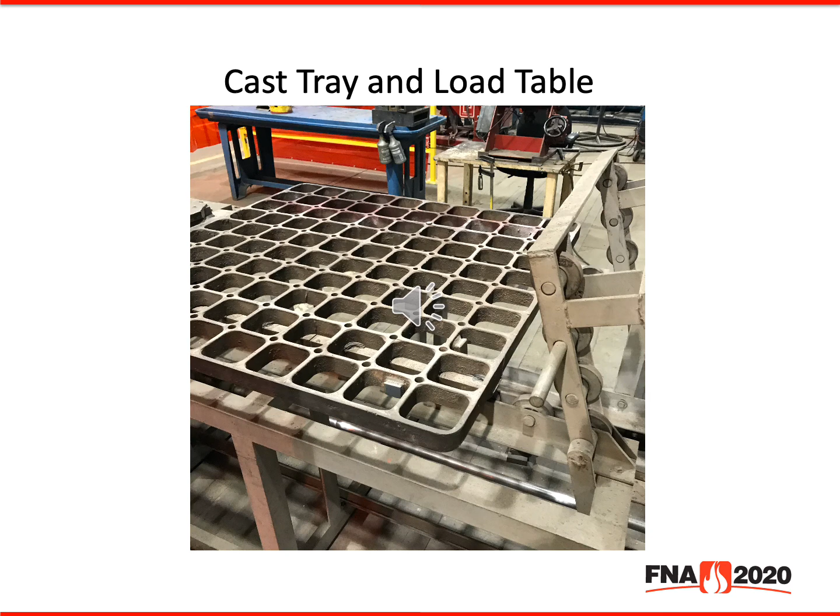In slide number 57, you'll see a cast load tray on a table. Again, this is push-pull, so you'll see some sprockets sometimes moving the parts in and out. Sometimes there'll be a little nose on these trays where the hook will latch onto the tray. This is a very common application for a variety of furnace types as well.

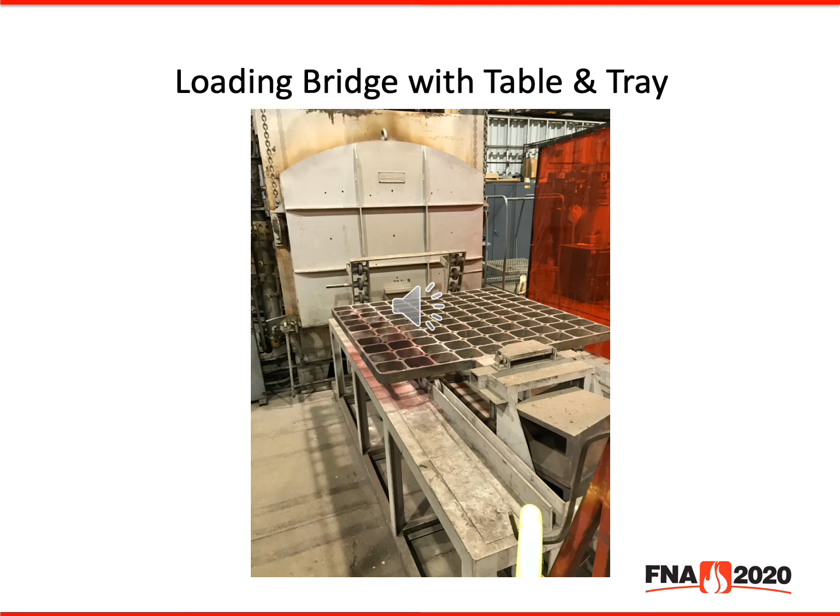In slide 58, you'll see another photograph of the base tray. There is a bridge extension door, so when the furnace door goes up, that little bridge extension goes down and allows the tray to be pushed across the bridge into the companion type roller rail hearth inside the furnace. This is a very simple system, often used as a companion kit for these heat treating furnaces.

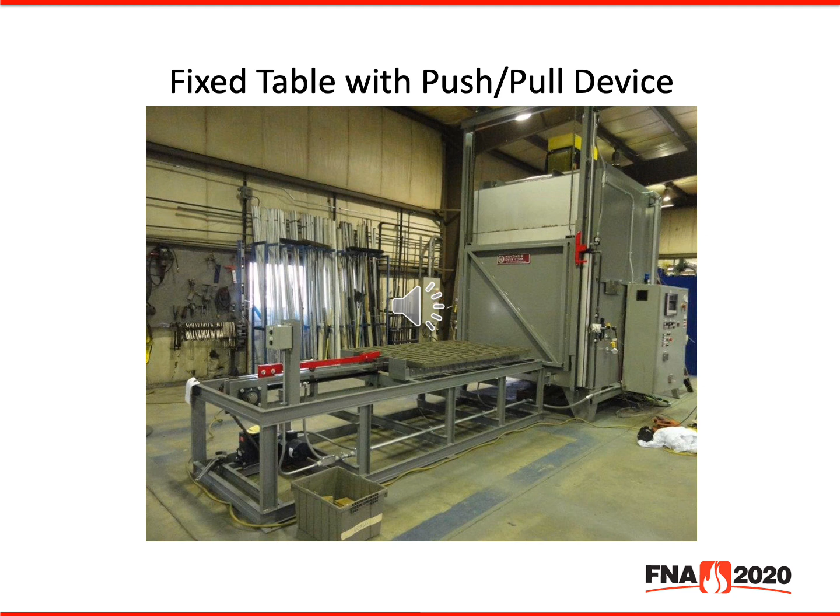In slide number 60, you'll see a little more sophisticated gearhead type motor. These are sprockets and gears that drive a pusher head that may have a head on it, or a toggle, or a clamping device, or a pair of pusher heads driven by a chain that push the load in and out of the furnace. In this particular case, this bridges over the top of a quench tank and actually pushes the load all the way into the furnace, then probably pulls it back out, stops over the quench tank, and free falls into the quench. When it comes up, it would engage itself again and pull it onto the table for the next load.

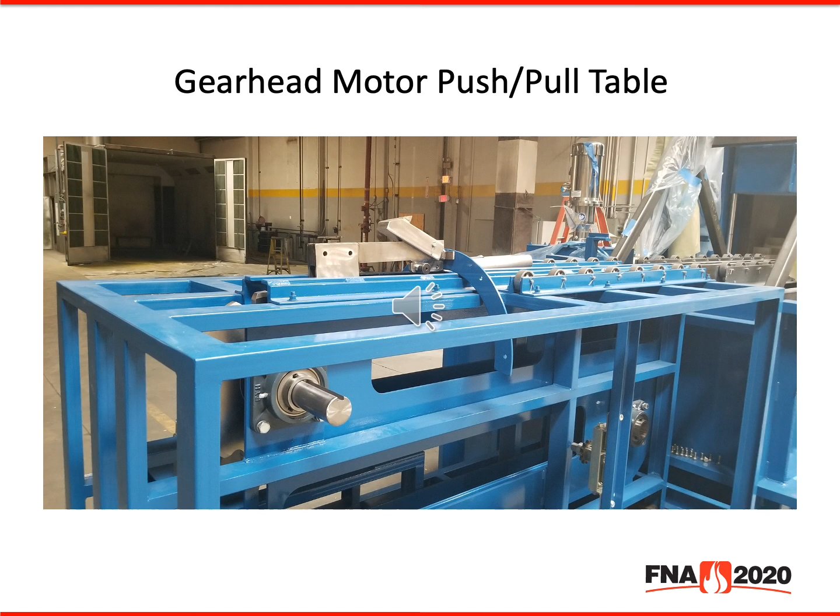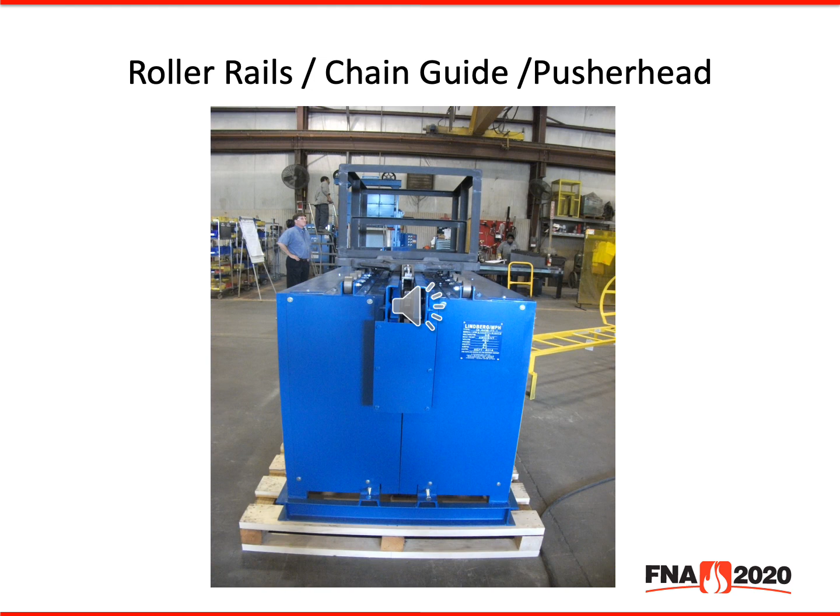In slide number 61, you'll see the face photograph of roller rails on a chain guide with a pusher head. This is a cart with the rails on it. These are typically used for integral quench type furnaces. What this illustrates is the pair of roller rails with the proper spacing. The tray has a slotted notch in the bottom, and a rack, or tray, or series of trays would fit on top of that. You also see the chain guide casting that rides inside this track to push the chain, and it retracts and folds itself up underneath. This type of charge cart would be used for an integral quench furnace line that would also feed the temper furnaces, the washers, and the integral quench furnace.